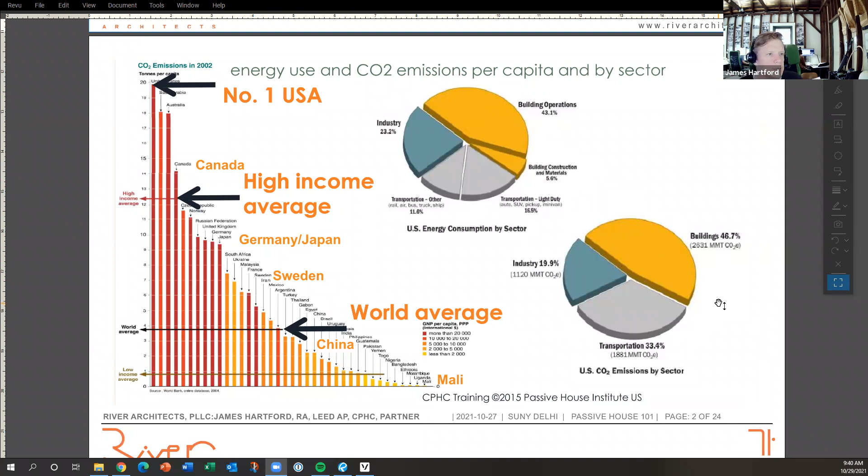But again, the good news is that you're looking at these big yellow slices here of these pies, almost half of it falls into our lap. And these numbers are a little different from the previous slide, but you can see that in the 40 plus range of the carbon in the entire economy is allotted to buildings, and so this is our chance and our opportunity. So, the thing about Passive House is that it's about reducing the energy wasted through the building envelope primarily.

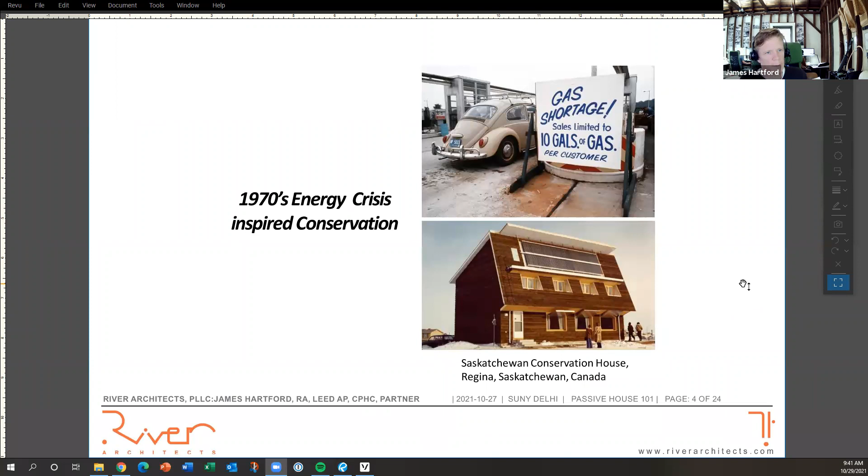And the history of it comes from the energy crisis of the 70s, and the first response to it was this Saskatchewan conservation house, which was really an experimental project in a very cold climate. But rather than just doing big solar, I'm going to just scroll down to this one. I actually know this man, Richard Levine.

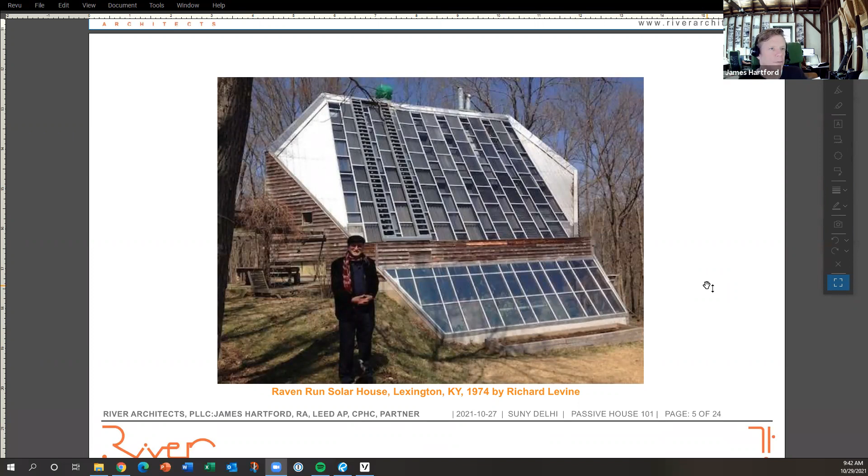Rather than doing big solar collectors that kind of both fry and then freeze as they cycle through the day, the idea of the conservation house, which really kind of outlined first what a passive house should be, is to just have modest amounts of solar heat gain, and to manage the losses and gains equally. So there's a solar thermal collector here, and shutters to help regulate heat loss during the night.

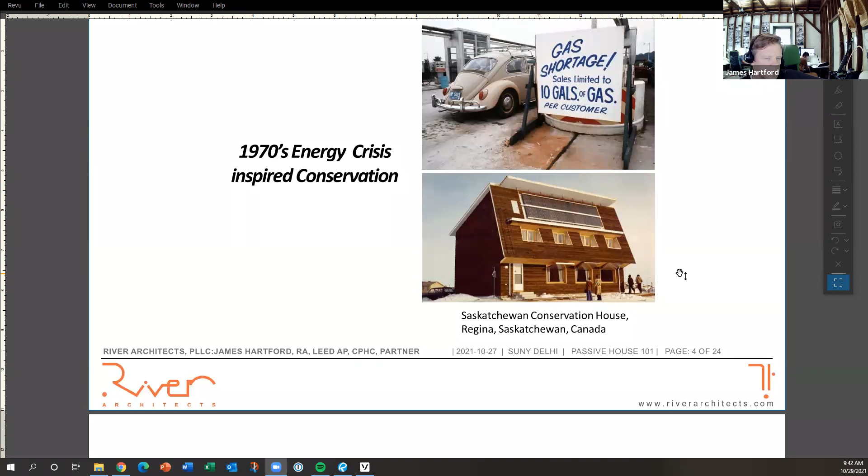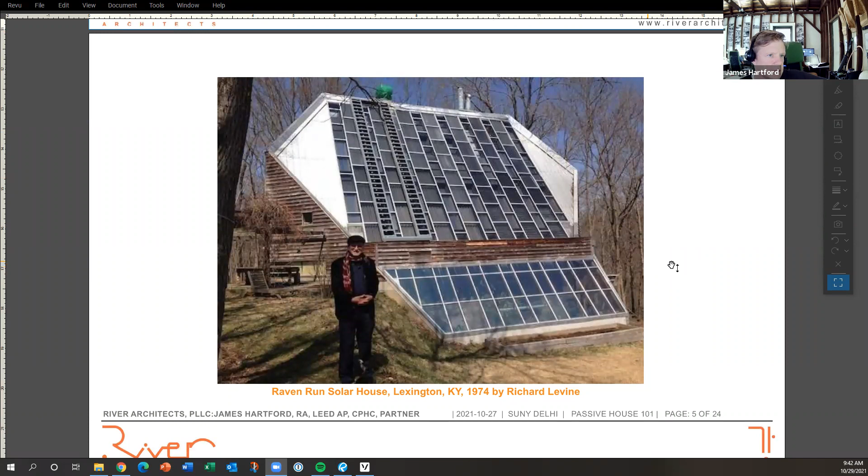And this is using off the shelf technology that was available back in the 70s, and now we've got much better techniques and materials available. So passive house is different from passive solar, which this is an example of, but the idea is about creating balance. So a conventional building, we can just look at it as just leaky and poorly insulated.

And the principles of passive house are basically to air seal it so that we eliminate the free flow of energy through gaps and holes in the construction, which create two things. Energy loss is one thing, but it's also moisture transfer, which when you transfer moisture across a temperature gradient, you create condensation, which is a very big concern for durability. And so air sealing is a core principle both in keeping a building from basically rotting from its own occupant load, but also to conserve energy.

Then after air sealing, insulation is critical, and protecting the building envelope, the insulation and the air sealing layers, with a proper weather-tight shell. And now, a critical thing though is that when we make airtight buildings, the occupants need to breathe. So early experiments in passive house had a lot of problems with air quality and actually mold growth because of the rampant condensation as well as high levels of CO2.

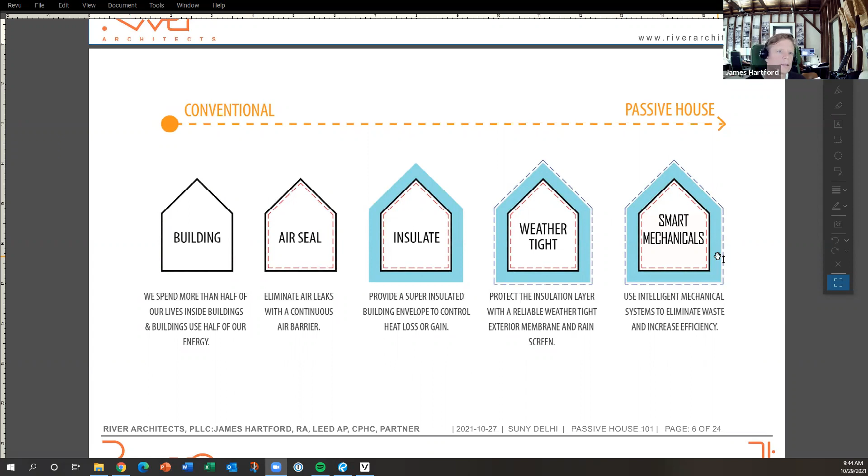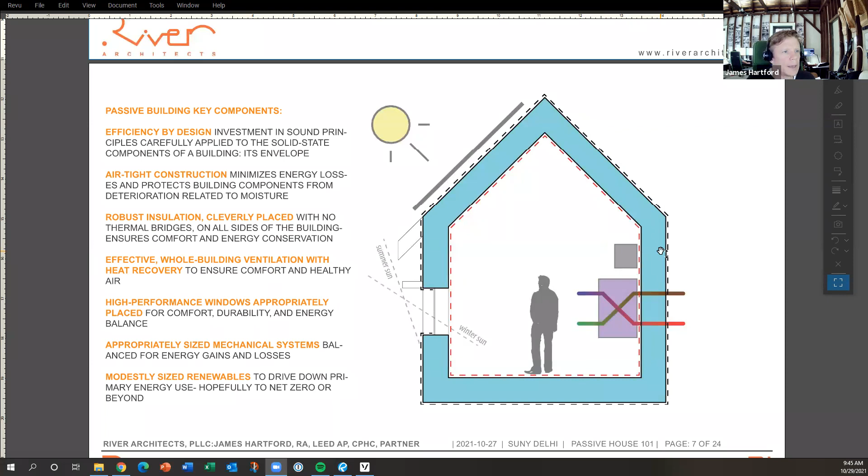And so kind of putting it all together diagrammatically, it's a simple structure with the fresh air ventilator here, a small, tiny little mechanical system for creating really backup heating or cooling. And an important aspect too is solar control. So these are things that you'll see eventually in the Cidery project as we get to it.

So we ask a lot of a conventional building, where we put both the aesthetic layers, both the exterior and interior sheathing layers, and the structure and the mechanical systems and the insulation all into one tiny little component, a typical 2x4 or 2x6 wall. And there's a lot of opportunities for air leakage and for thermal leakage when we have all this stuff crammed together. Thermal bridging, so where the studs are, heat transfer is very easily accommodated, which is not a good thing.

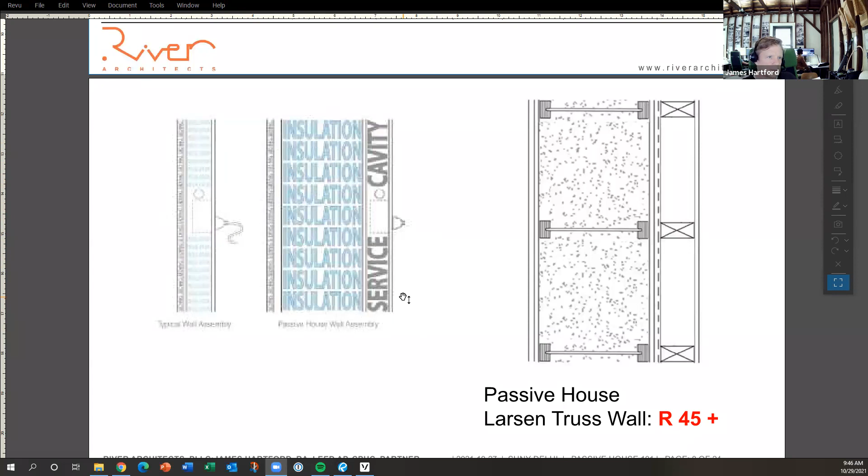So in a passive house wall, we like to just kind of separate the services and the functions so that we get them each to do their job better. So we have a much more robust insulation layer, a dedicated service, and usually structural layer that allow those things to happen uninterrupted. A ventilation layer on the outside so that we handle moisture much better, so that the exterior wall finishes hold up longer. So this is what the actual wall looks like in practice.

This is a section cut, plan cut through a typical passive house wall. So 2x4 structure, an airtight layer here, the insulation layer here with what we call Larsen trusses, which are essentially I-joists set vertically.

The thermal bridging of those little OSB layers is tiny to negligible, but we actually calculate that too in the heat flow calculations. So, a typical wall in New York State would be R19, or code is now adjusted a

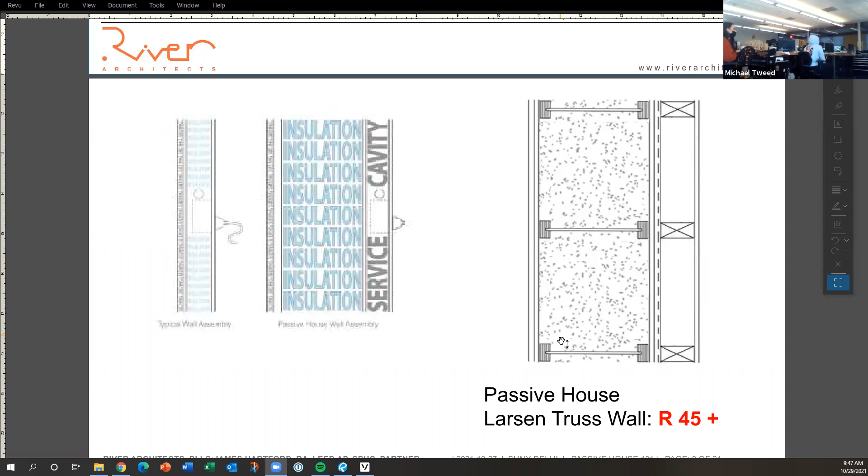little bit to, okay, now I'm getting that feedback again. So, okay. Turn down the volume of the TV a little bit, see if that helps. That's weird because it just came out of nowhere. All right.

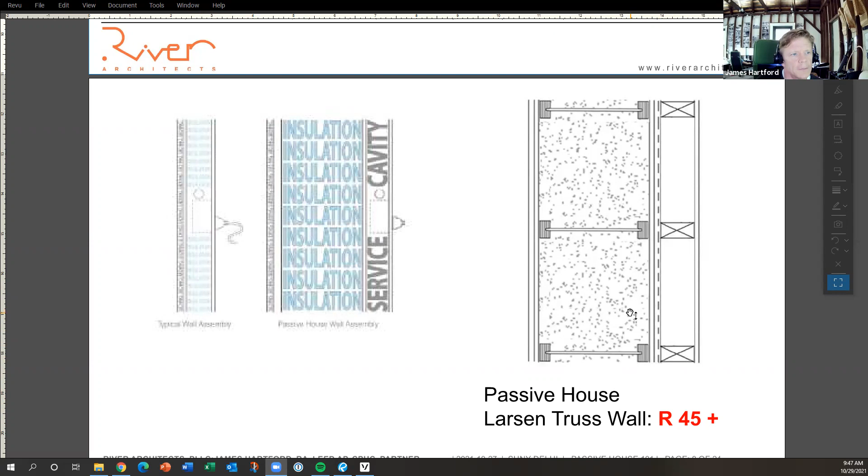So we typically see about an R19 wall for conventional construction, and we're R45 to even R60, 65 for a typical passive house wall. And just kind of looking through the history of mechanical systems throughout North American history here. 19th century, people usually used wood or coal to heat their houses and put on a sweater. Then we made things extremely complicated and hard to run. And then passive house is really in a lot of ways coming back to those simple methodologies of the early days, but with good building science added to know that we can have more comfortable spaces and healthy spaces for people.

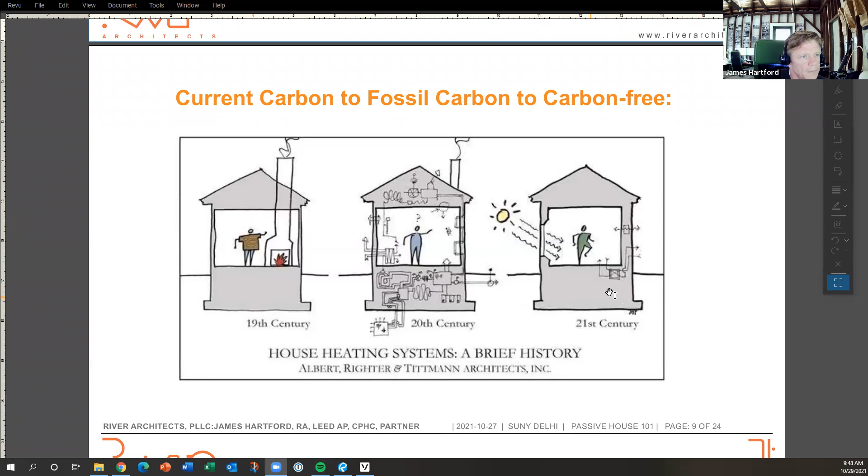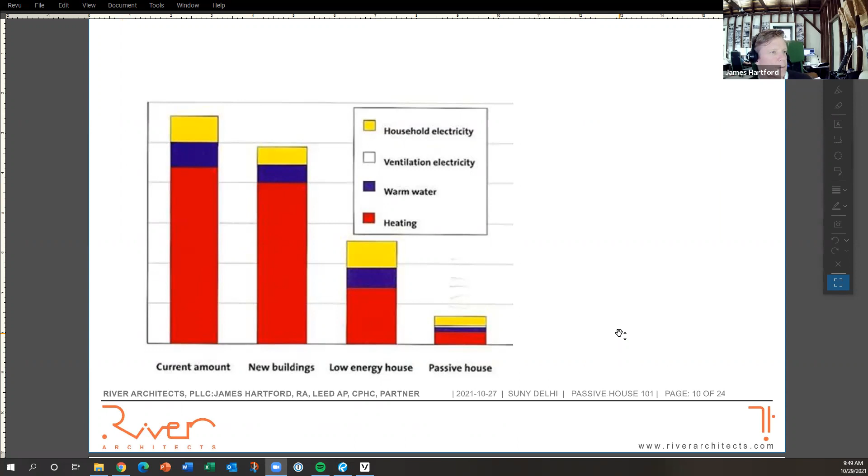So the energy conserved is considerable for a passive house. We're typically saving 70 to 90% of the energy needed to heat or cool a building before any renewable power sources are included. So by doing a very well conserving building envelope and doing smart mechanical systems, we're able to drive the energy demand 70 to 90% lower than current code buildings.

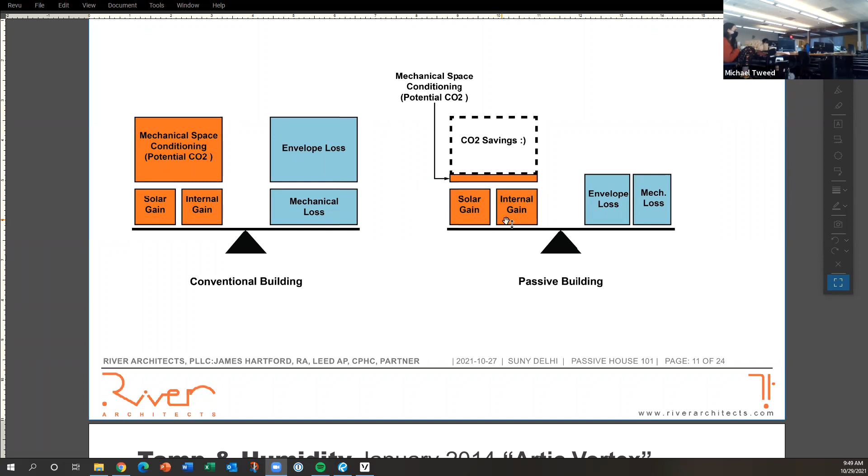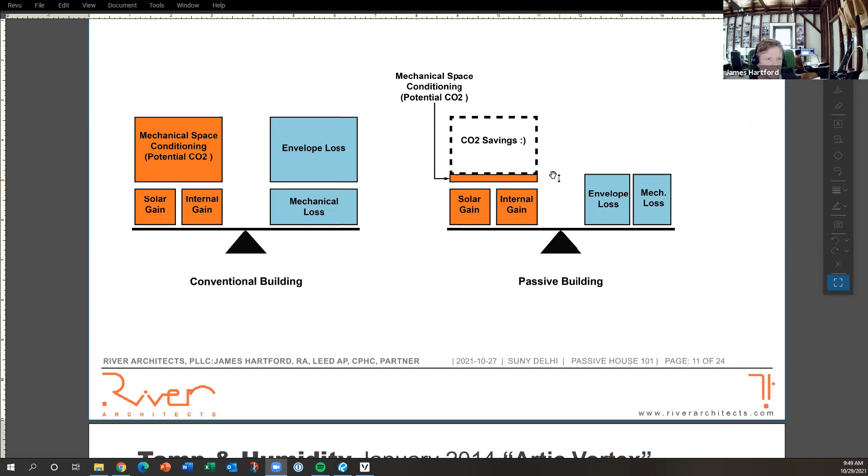And so, it's really, again, about balance. In a conventional building, balance is obtained by letting energy losses just kind of run high and then making up by huge mechanical systems. And so our goal with passive house is to lower the energy and the envelope losses to such small manageable levels that essentially they're balanced by solar gain and internal loads, such as occupants giving off heat or the heat from our computers, so that the amount of energy needed to be added to the system is quite small.

And just looking at how these buildings perform, this is the Arctic vortex from January 2014, where there was a severe storm that basically knocked out the power grid in some places for as much as 2 weeks. So when you have conventional buildings that lose power, people are immediately put into harm's way because the buildings can no longer sustain life essentially. So as soon as some climatic catastrophe happens, such as the snowstorm in Texas last year, or the polar inversion, or if there's a hurricane that comes and knocks out power, people are usually in a pretty bad way right off. But in a passive house, there's a level of survivability, especially in cold climates, that it takes very little energy to heat or cool, and people are not put in harm's way and don't need to be evacuated.

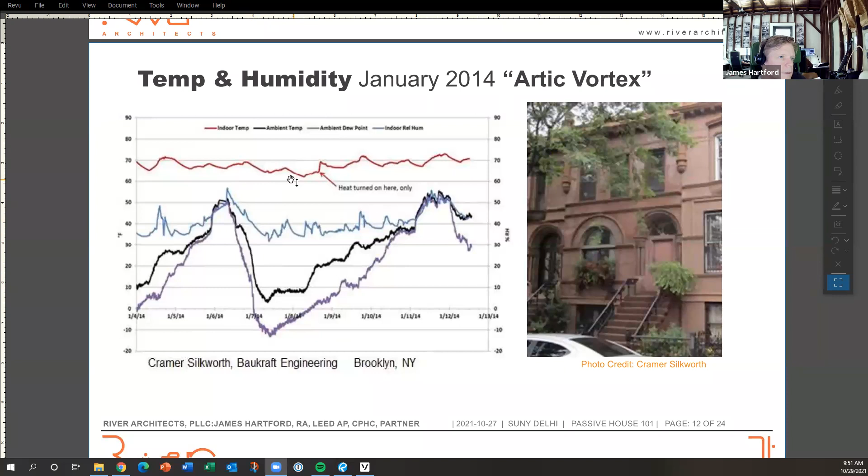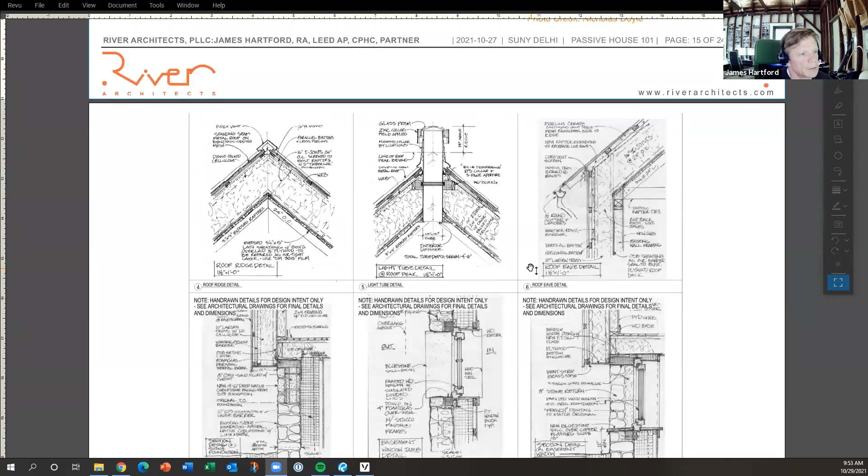But some of the details that I had developed for it. So you can see that the original timber frame is here, and then we air sealed over the top of the existing sheathing, and then did the same Larsen trusses that I'd shown in that earlier diagram, both for the roof and for the walls.

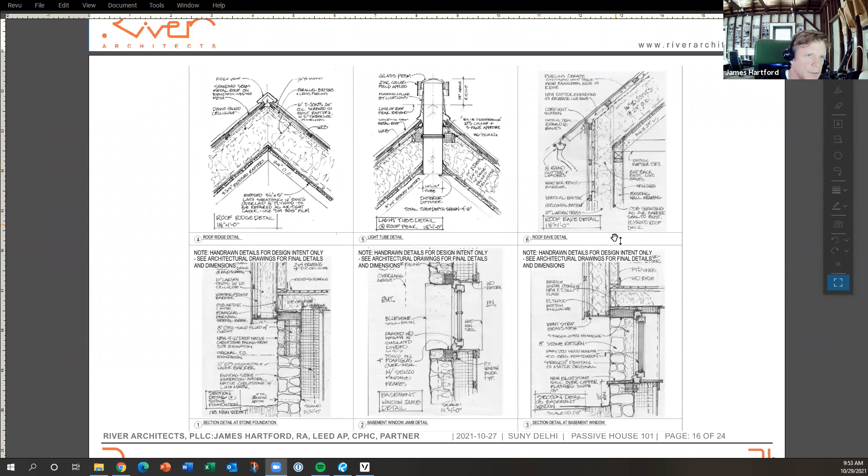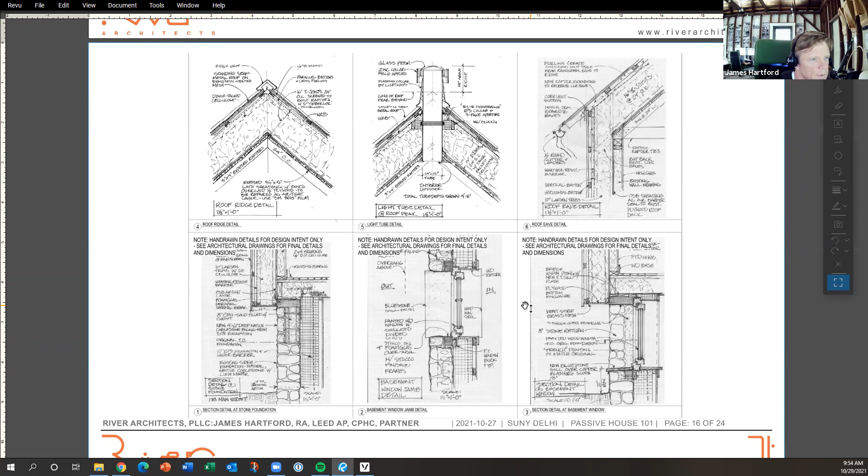So here it shows the walls as being sheetrocked, but we actually left the timber exposed. And this is an early detail where I'm showing the original stone foundations and then what we were planning to do to extend them. What we ended up doing was taking these out and then building the walls outward, so we actually gained an extra foot in each direction by redoing it, and eliminated this heavy overhang that was resultant from working with original foundations. So the end result was actually better than trying to work with the existing.

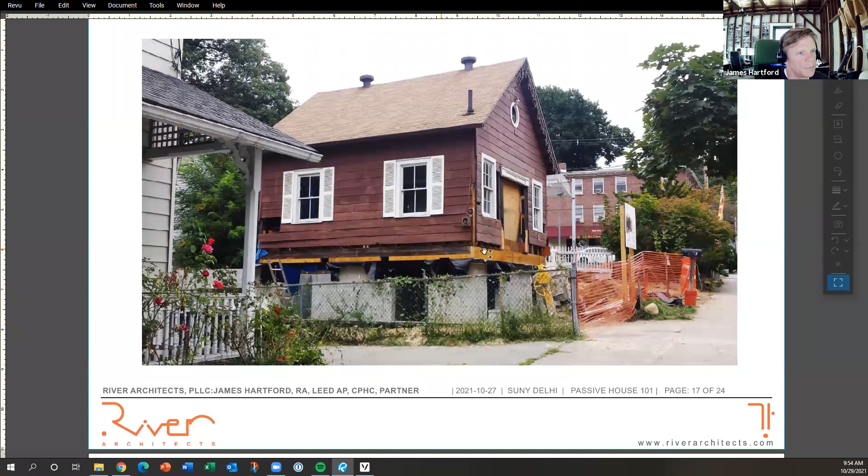But this is the building after we had redone the foundations and put the frame back on the foundations, before we stripped away the fake shutters and all that. We actually have a thermal break between the timber frame and the concrete block, which was doing all the heavy lifting of the structure. You can see right there, it's a 4-inch thick foam glass layer, so that we've eliminated thermal bridges entirely.

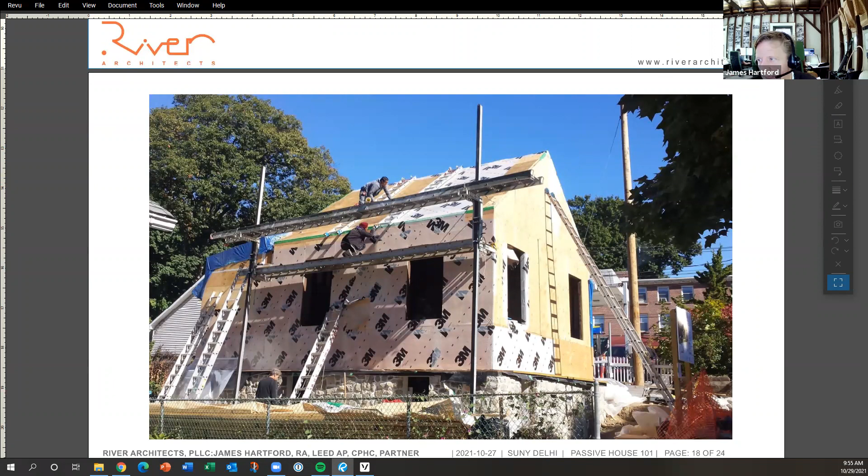So we had cut back the eaves so that... I gotta do something about this mic. It's killing me. Sorry. Okay, so

We cut back the overhangs so that we simplified the structure so that we can air seal directly over. So this film was basically a peel and stick that we applied to the new sheathing that we put on over the timber frame, and we had left the original sheathing on the roof. It's not the true original. It's board sheathing underneath it. You can actually see it in the space here. And by cutting back those eaves, we were able to really make this very simple to air seal and then to apply our Larsen trusses over that.

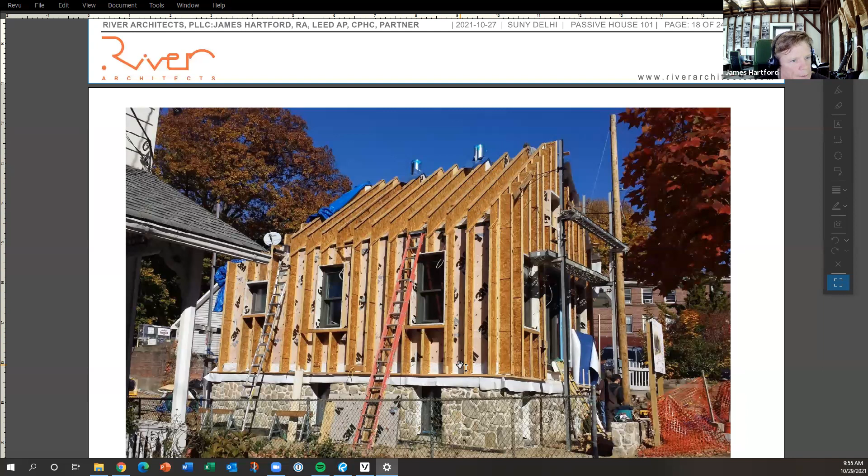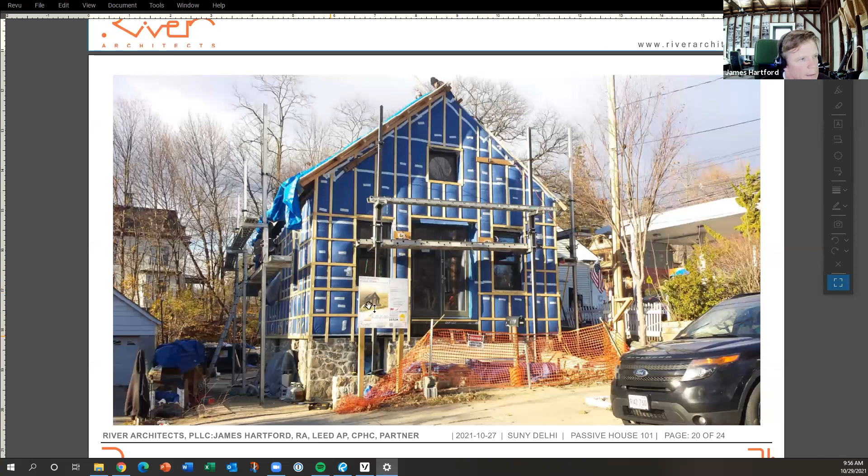And these tubes here are light tubes that bring light in high into the roof system. They're placed actually where the original roof vents were from the open forge that was in the middle of this space from the blacksmith days here. So these, what we call Larsen trusses, are then wrapped in a blue fabric. You can see it starting over here, and then dense packed with cellulose insulation, so that it's analogous to a puffy down jacket.

And then we recreated the rafter tails so that we bring back the original look, because we are in a National Historic District, and that was an important aspect to them. So the end result is that we have the timber frame as it was originally constructed, and how the original inhabitants used it when it was the blacksmith shop. So we brought that bit of history back and kind of upgraded it to face the future where we have to stop using carbon in our buildings.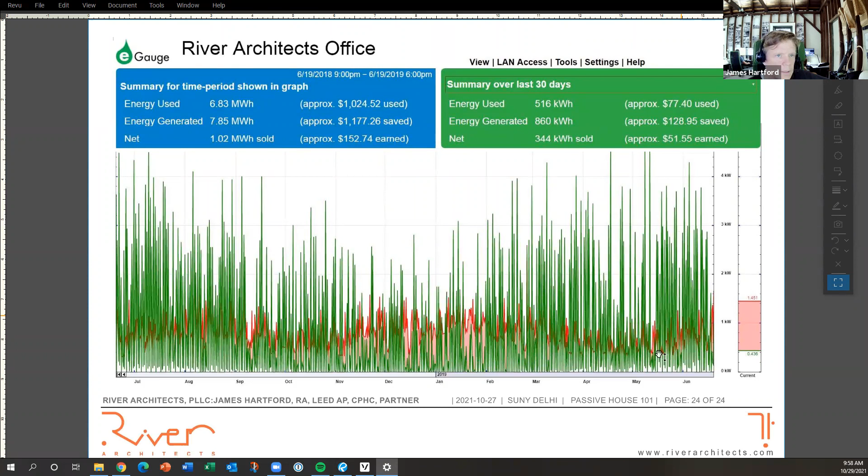You can see all those green peaks outweigh those red peaks considerably. The few days of bad weather, late January, early February, are greatly offset through the course of a year. So that's the presentation on Passive House.

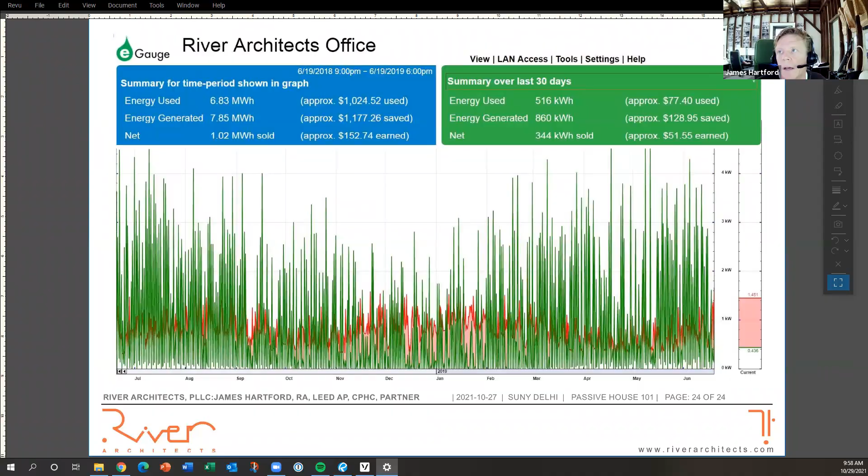All right, I had it on mute because I thought that might help the volume. That helped a lot. Thank you. I appreciate it. Did it? Okay. Yeah, it's hard to keep track of your thoughts when you hear yourself. Yeah. I finally figured that out.

Okay. Any questions about Passive House? I'll pull them through so you can hear. Great. No questions, you guys? What do you guys think of Passive House? Pretty cool. You think it's pretty cool? Yeah.

Do you think it starts to be like some of the reasons we talked about in general about how we have the spacing for the material and how we're talking about really thick walls and roofs as we're drawing our sections and plans? And this also is about R value. Can you explain a little bit for our students about the R value of materials that you use for the Passive House certified buildings?

Great, yeah. And so the materials we use for insulation, and I would imagine that you've all had classes on thermodynamics so that you understand what an R value is and that it means resistance as opposed to conductance, and that the inverse of R value is a U value, which is about conductance.

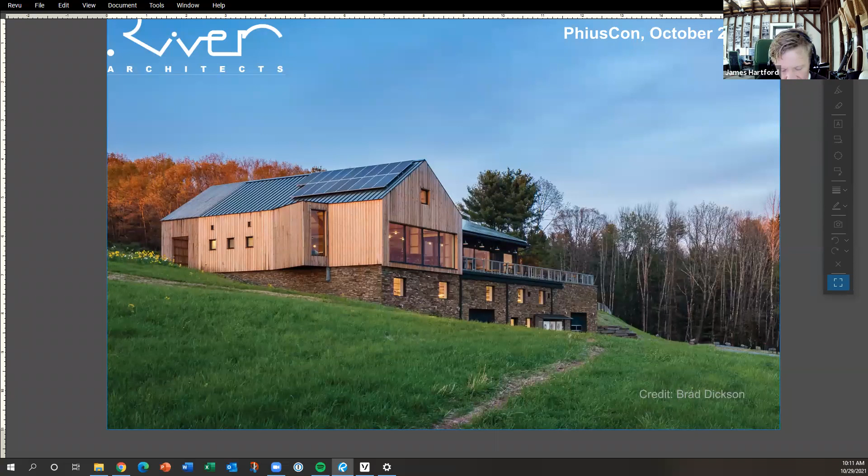Oops, let's see how that. Okay, let's hope this behaves for me. For some reason, this is not scrolling. Okay. The TV cut out on us, so we didn't hear the last minute. Okay. So one's on mute, so hold on. Let me do this. I'm gonna try this. Okay, I think you're back. Can you see? Okay. Great. Yeah. All right, so good. I'm having some technical issues. Oh, okay, now I got it worked out. I have to relaunch my share. Okay. Okay, I'm good. There you go. Okay, here we go. All right.

Sorry. So our Cidery project, we completed this this past winter. I've given this presentation at the PhiusCon conference in Tarrytown just the start of this month. It's roughly a 9,000 square foot building that's both event space and tasting upstairs and production down at the lower level. So let's kind of talk to you about who we are and what we're doing.

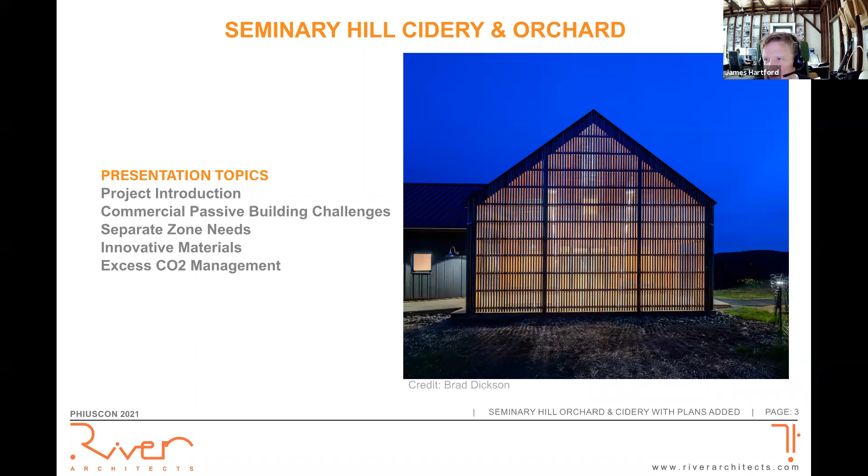And so our cidery is the world's first fermented beverage passive house in the world. So we've beaten out all the breweries and wineries and other cideries throughout the world. We were approached by the Doge family, who is a multi-generational family in Callicoon. They've been there for I think 4 generations, and have a long history of apples in their family, including some bootlegging as well, when they were making cider during prohibition.

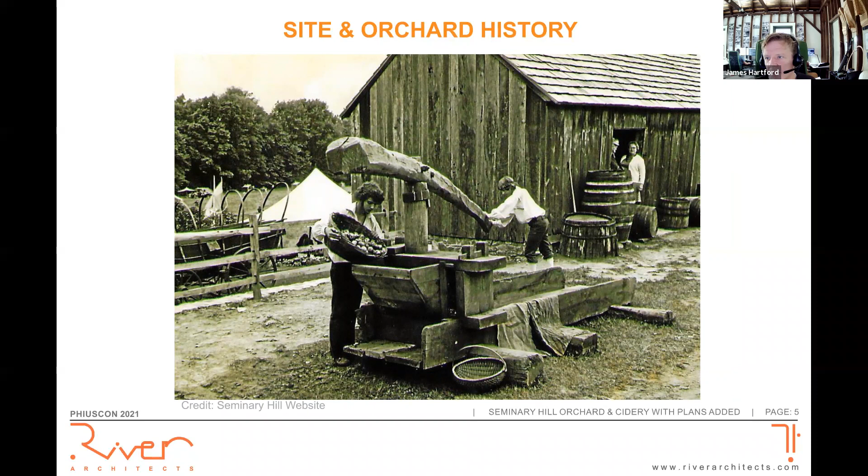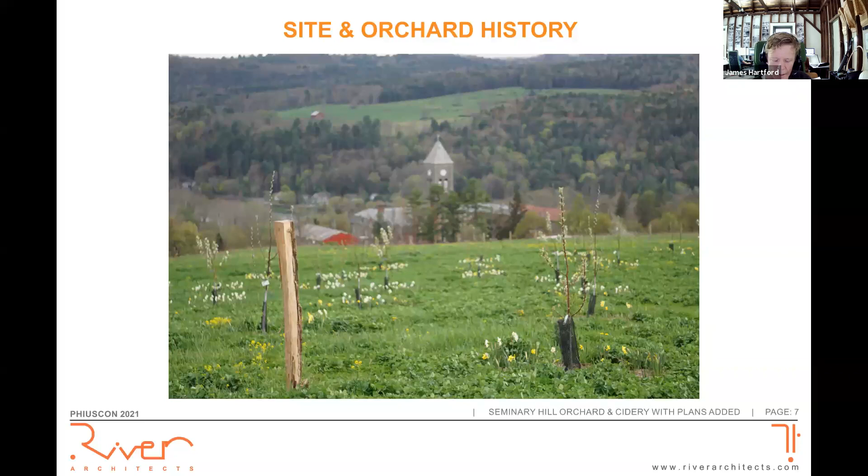What you can see here is the co-planting that's done. All the tulips and daffodils are planted around the trees because it actually keeps voles from digging through in the wintertime and harming the trees. The voles are rodents that will gnaw the bark off of a tree and kill it. And so the bulb plants actually persuade the voles to go elsewhere.

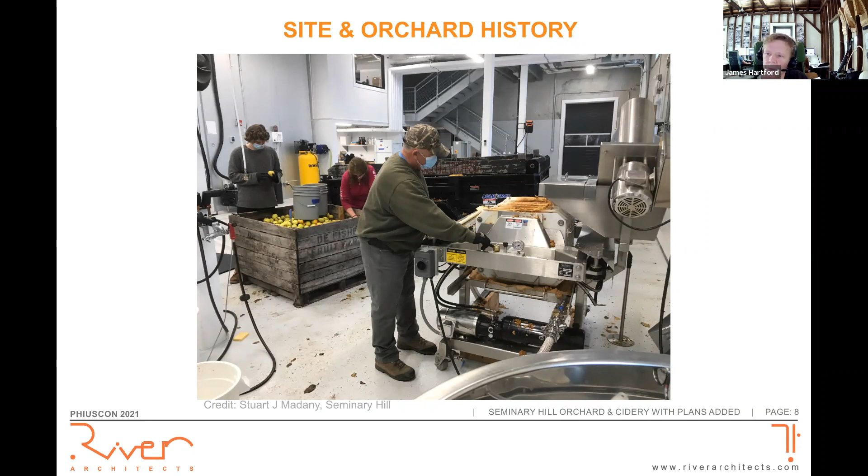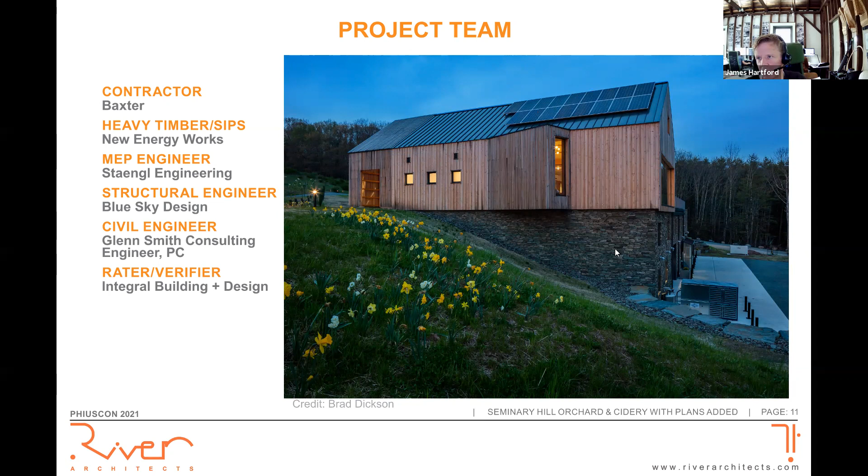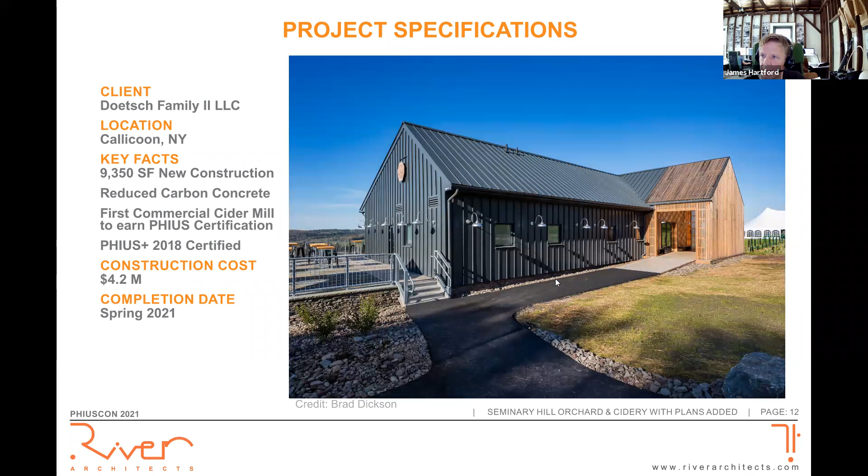And so the building is, this is the approach to the tasting and event space upstairs, and the cider production is down below. Site plan, it's a little hard to read here, but you can. Here's the access road. It's uphill, and then it's all downslope to the orchards here. So the apples are brought in at the lower level, and trucking is there, and the public approaches from the top.

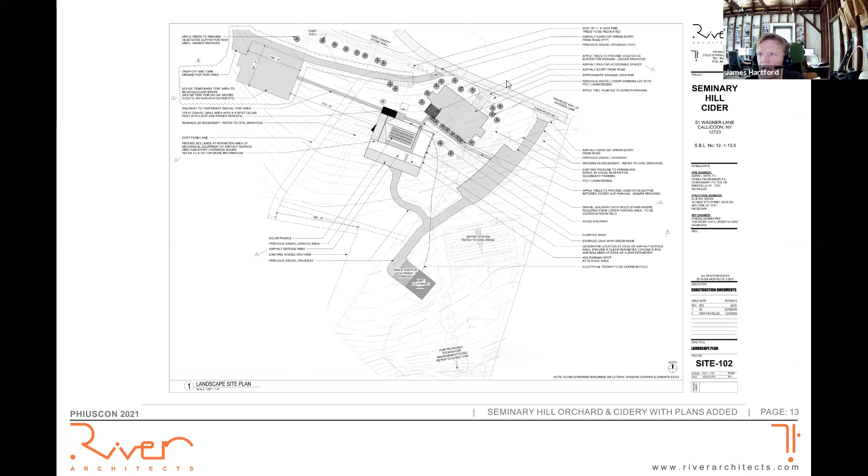It's very hard to see here, but this is the construction plans of the tasting space. So here's that entry porch there, and the main entrance into the space. On the main tasting room and that peek out window there, a commercial kitchen and a tasting bar area there, and then restrooms and changing space there. Stairs that go down to the lower level, and another kind of dining space, and then that rear balcony that

looks out across the valley, and then actually an outdoor dining space here that's the roof of an aging cave that's actually non-conditioned space in terms of mechanical systems, but it's built into the hillside and taking advantage of the constant temperature of the earth, and then plus essentially a green roof on top of it.

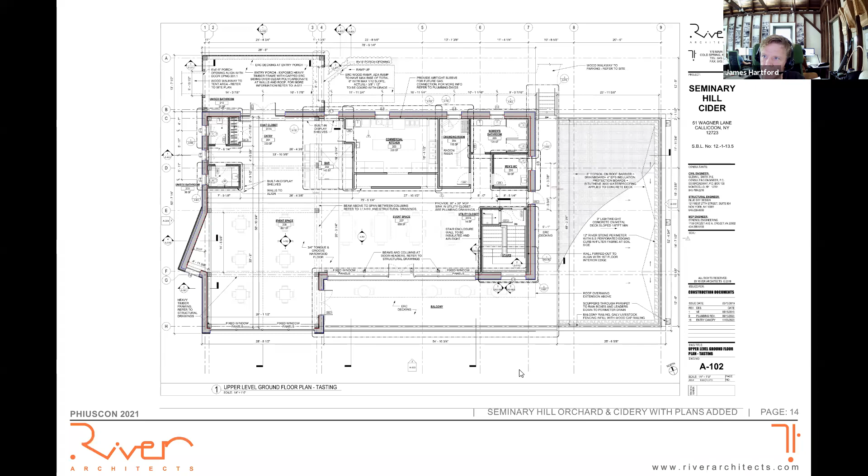Okay, and then this is the lower level. So this is the cidery production space. So here is our apple pressing area where you saw that one photo of. And then this is the fermentation area. And so these are the vats where the cider making happens. You can see here these dashed lines which indicate the floor drains.

So the floor slabs are pitched towards the center drain, so that everything is washable, and if a fermenter or a vat leaks, it goes into the drain and doesn't create any kind of problems. You can see that that happens in several different places, and also inside of the walk-in cooler, which is this large piece here. Typically, the fermentation happens at about 50 to 55 degrees. Again, so that ground temperature really works well for that.

And then they use the walk-in cooler for actually, once the fermentation is complete, then they'll put it in there to cool it off so that it actually stops the fermentation process. And they have vats in there, or they'll have full kegs or full bottles as well, waiting for delivery that they'll store in there. And over here we have a locker space, but also a laboratory, which is really

important. That's where they may maintain yeast cultures for certain flavors, but they'll also test for the specific weight of the liquids, which will determine the alcohol content. So an important aspect to it. And hygiene is really important, so they're constantly washing. So the lower level is waterproofed up to 8 feet high up the walls, and so it's really just like essentially a clean bathtub inside of there.

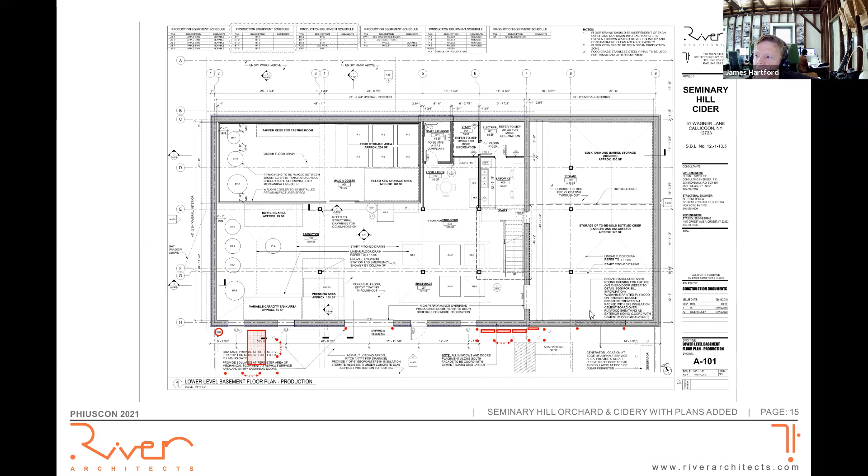This is that aging cave, and we call it a cave, but it's a human-made space, but essentially the function is the same as a cave. And then this is a section cut through, again, the upper level with the tasting space, the storage cave, and then the production space down below. And here you can see actually a little bit of the thermal envelope.

Because the upper space is really made for human comfort, this is one climate zone. The lower space is made for fermentation and apple storage, and so that's a separate climate zone here. And so you see the insulation layer across there. It's got its own airtight layer here. So this is one envelope, and the upper level is airtight and insulated.

Here you can see the insulation running through the deep trusses of the roof there, and here we've got actually structural insulating panels for this part of the enclosure here. And there's actually no insulation under the slab and very little insulation in the walls here, because we're looking for that ground contact, so that constant temperature coming off the earth, about 55 degrees, is creating all the conditioning that we need for that space.

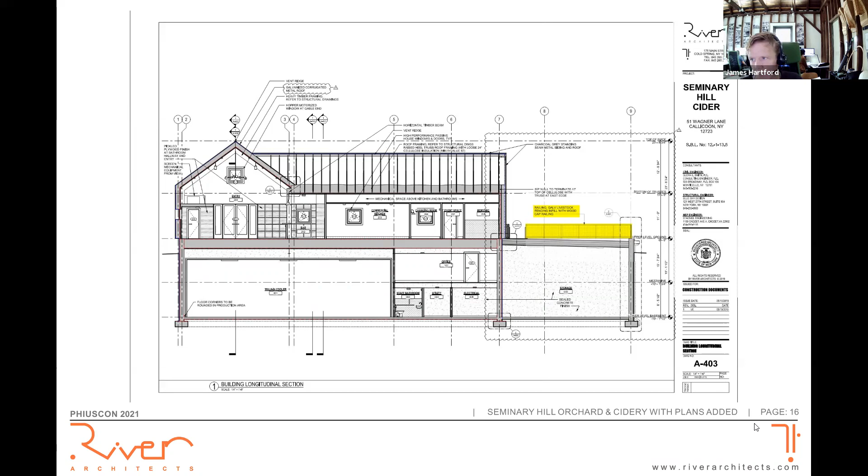So again, human comfort, apple comfort. So the interface of the two. And we use WUFI models, which is an energy simulation software that takes into account the R-values of our products, the solar orientation, the performance of equipment, and that really helps us calculate the balances.

So here you can actually see these green arrows. It's showing basically the heat flux through the windows, which is an important aspect there. And the stair tower connecting the two spaces is actually part of the thermal envelope of the lower level. So we have actually airtight doors and insulation there to separate that from the upper space here. And that's that.

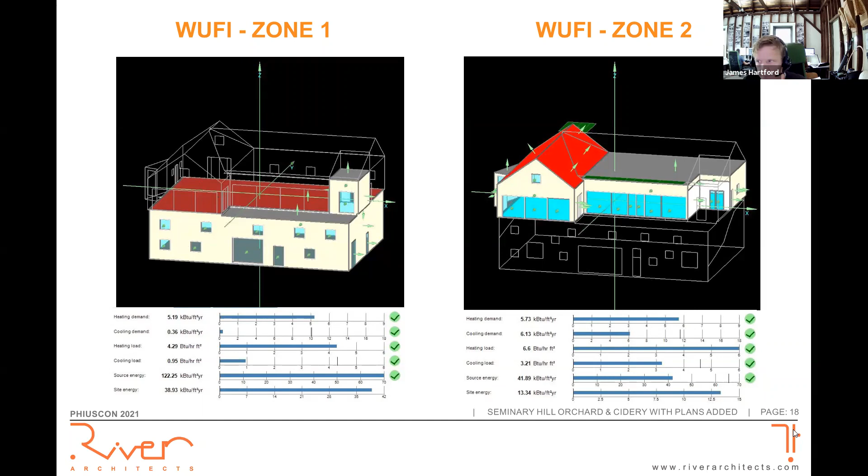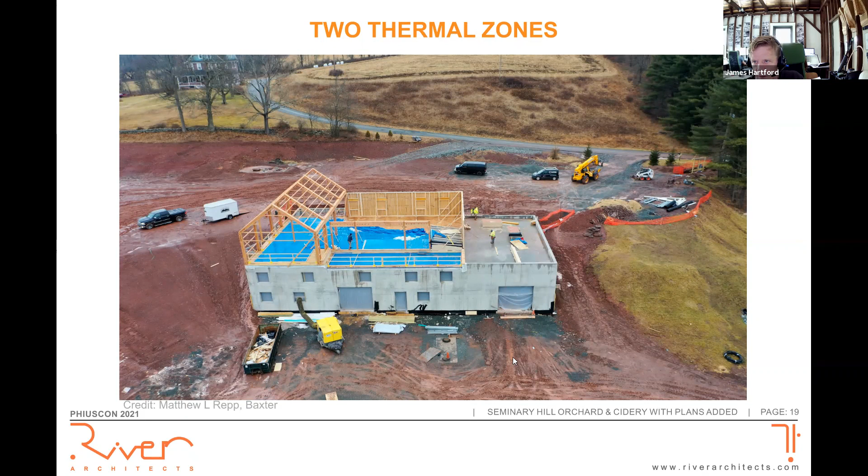Here's the cidery under construction. That red kind of Martian earth look is actually the local blue stone, as they call it. But here it's got a red color. But it took actually quite a lot of blasting to create this hole for the excavation.

So our wall systems, we have concrete with actually a glass additive, an expanded glass additive that makes the concrete insulative and also lighter. So it's actually a more sustainable choice than conventional construction concrete.

And here, in spite of what I had said about avoiding foam, sometimes we also have to look at the cost of things, and so we have EPS foam for the structural insulating panels, which are basically a sandwich of foam with a skin on either side. So in this case, it's an OSB skin on both sides.

EPS is actually a better choice than other types of foam, such as polyisocyanurate or XPS, extruded polystyrene. EPS foam has different blowing agent chemistry that has a much smaller global warming potential.

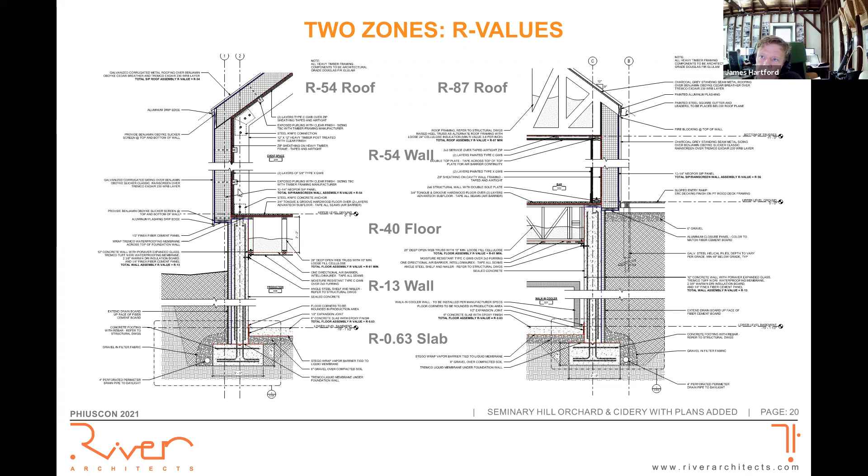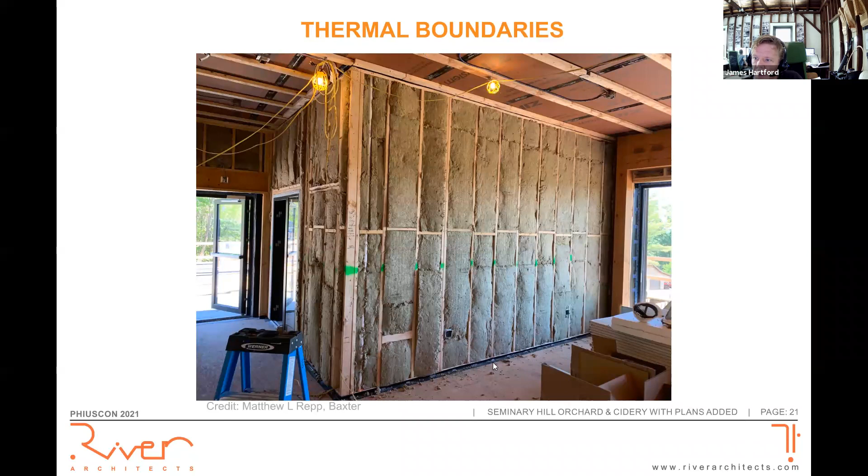We have a timber structure that's set inside of that, and you'll see more of that. So here's the insulation and the air tightness layer at the stair tower, and down below the exposed concrete with the additive.

All the steel work actually had that galvanized before it's brought in so that we don't have durability issues. You can also see the air tightness layer here, this Intello fabric that creates the air tightness and the air control so that we don't have leaking between spaces.

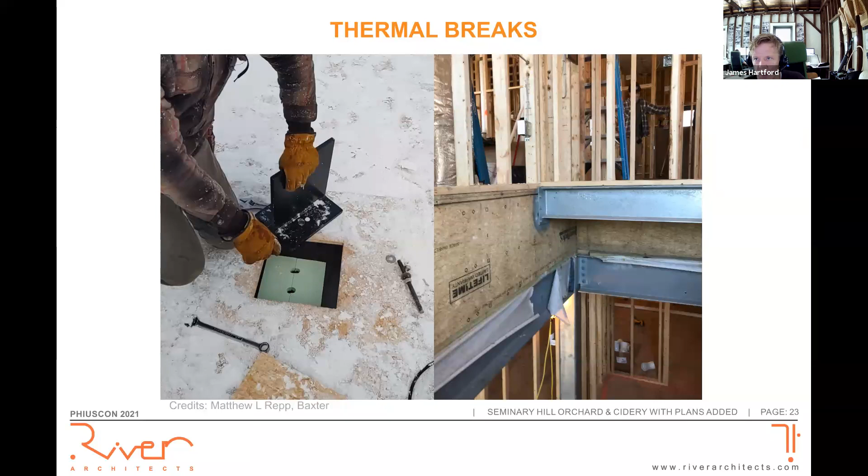And then the timber of the upstairs is actually set on these green pads, which are a high compressive strength thermal break. So it's essentially a type of foam that has very high compressive resistance, so that we're able to bear the structure on it and still avoid thermal bridging.

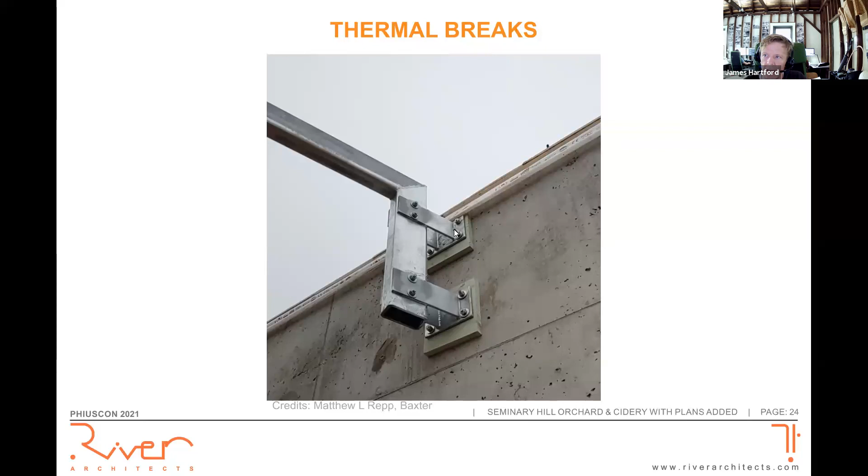And here you can see it outside. This is the bracket that supports that peek out window. So these brackets are actually stainless steel, both for durability, but also for conductivity. Stainless steel has much lower conductance than carbon steel.

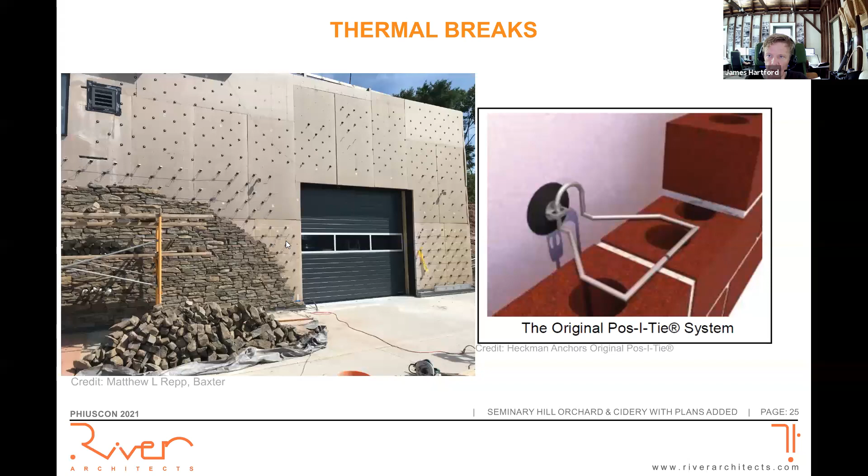And then foam with ties that are supporting the facade of stone. And these ties are actually thermally broken too, so we're reducing the amount of conductance through these structural ties.

The garage doors are actually high performance doors, and everyone knows from their parents' garage doors that they can be leaky and miserable. With these ones we're able to meet our very tight air tightness and thermal performance requirements.

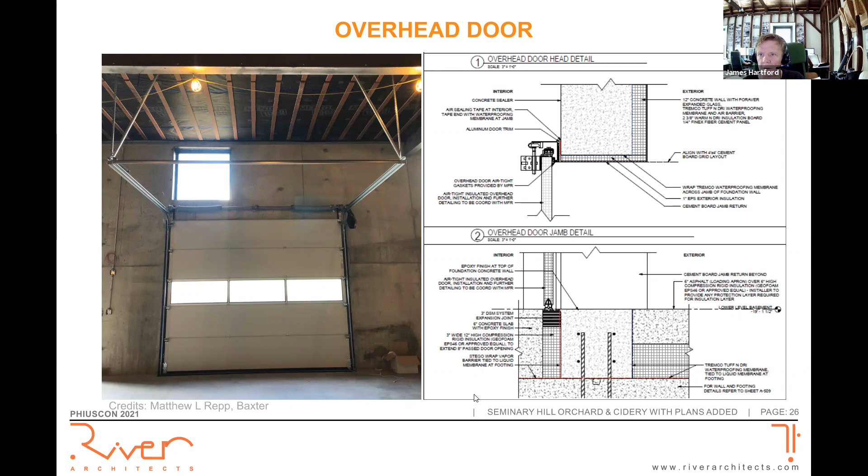And it's really important to make sure that where the windows come in, their air tightness is maintained, so that we don't have leaks around the sashes and all that. So we use liquid air barriers and tapes to do that.

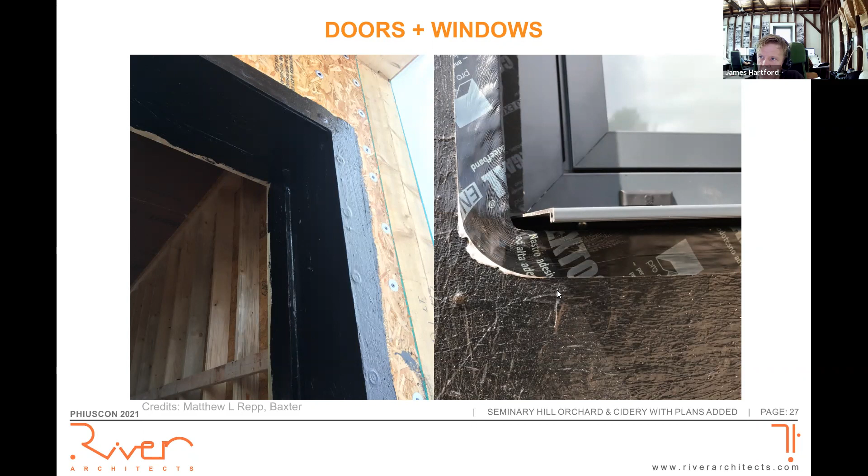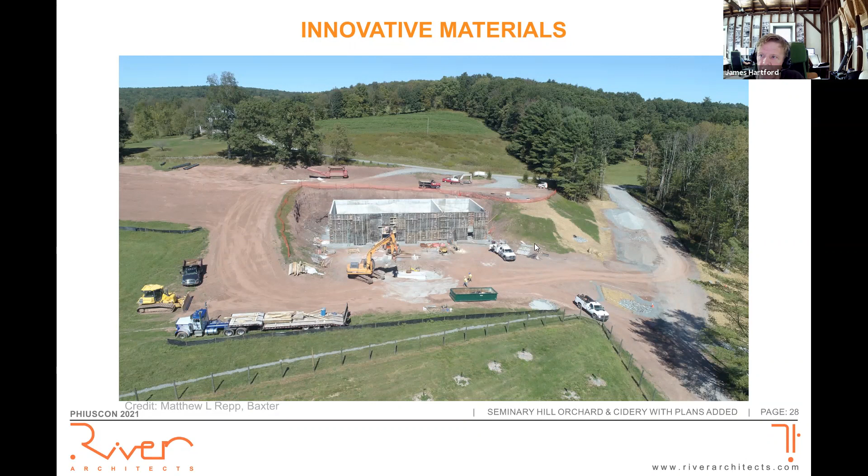But the risk of those in high walls like this is that they can actually burst, and those blowouts can be a really big problem on a job site. So our concrete guys were very nervous about that. So switching to this expanded glass product simplified the concrete pours. We were able to use conventional formwork, so it was less risky.

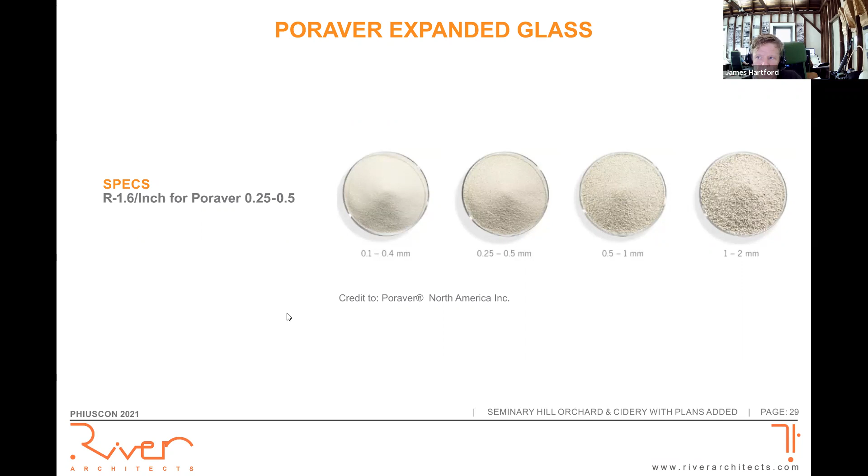So the glass beads are poured directly into the concrete mix. They added a decent level of insulation that converts the concrete essentially from a net conductor to a net insulator. It's not a huge thing, but its conductance is actually better than wood. So it's an upgrade. And it's really, again, standard concrete forms. It's just simply added in this bag here into the mixing truck and then poured into place.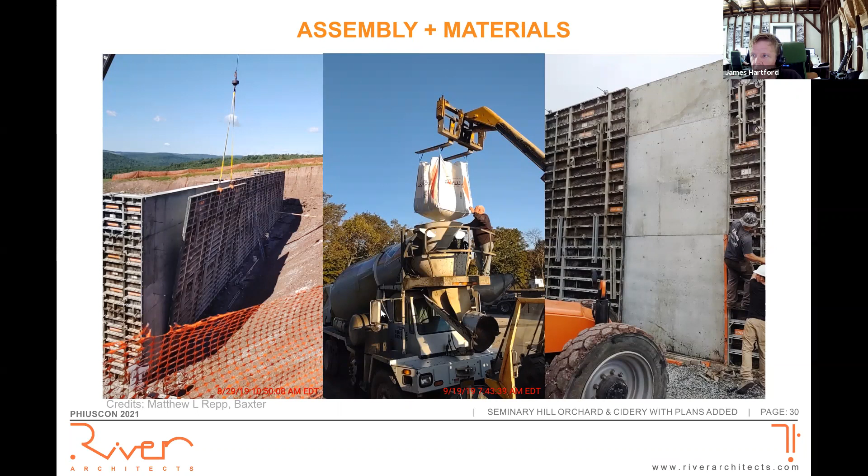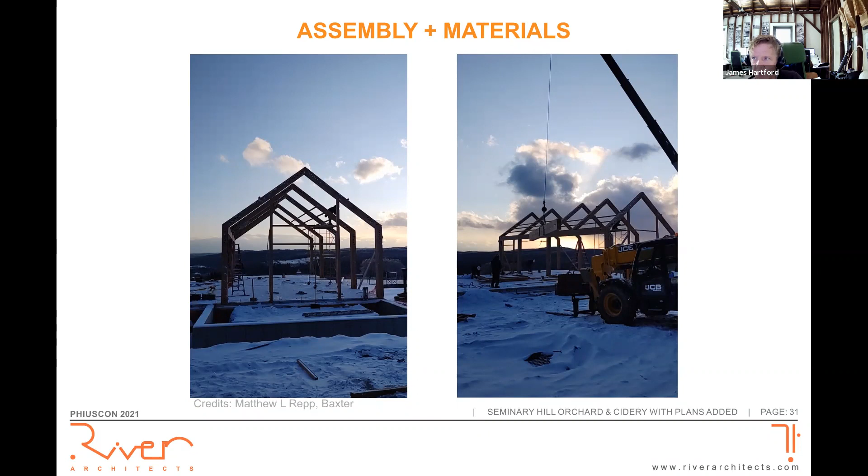The timbers were all made off-site as well as the SIPs, so all of this aided in the construction time. It was a really hard winter that we built through, which created a lot of problems. All that snow was hard to manage, and it created some water intrusion problems when we were in vulnerable stages, but we made it through.

But you can see the pre-cut, pre-shaped panels. These are coming directly from the factory with the windows pre-cut into them, and the splines and things that are structurally necessary for them are done in the factory. So it just gets picked off of trailers and set with a crane onto the site.

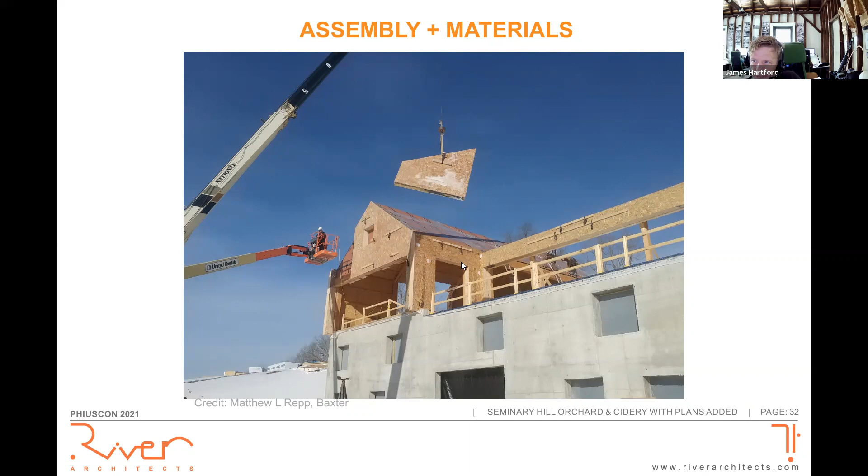Again, the heavy timber came from the factory actually, even with a coat of finish on it, and the steel connectors all done in the shop, so it was much better controlled. We had standing seam metal, which really receives the solar array quite well, and then our rain screen on the outside there, and then the finished wood is actually reclaimed from the old Tappan Zee Bridge that was demolished.

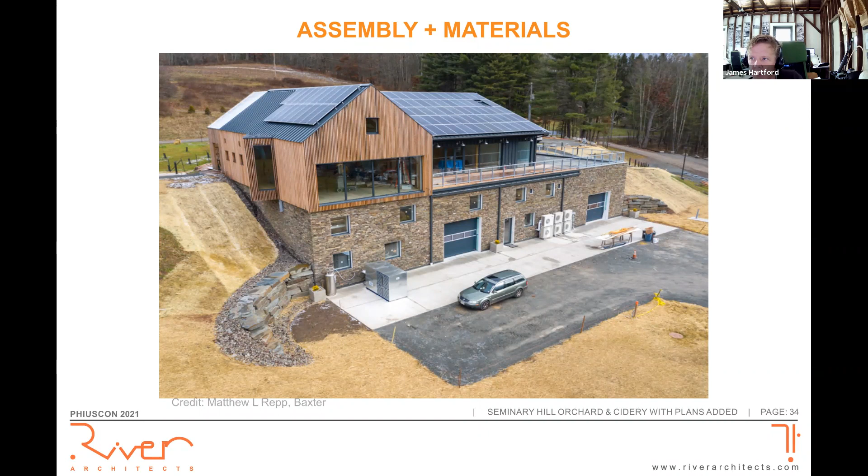There were actually wood pilings that were surrounding each of the piers of the bridge to keep ships from damaging them. Those were actually old growth larch from New York State that we were able to purchase. A mill had bought all of the timber that was pulled out from these, and it was over 1 million board feet, and so we were able to use that. It's naturally rot resistant and beautiful, and it's locally sourced sustainable wood. And standing seam metal because it's cheaper.

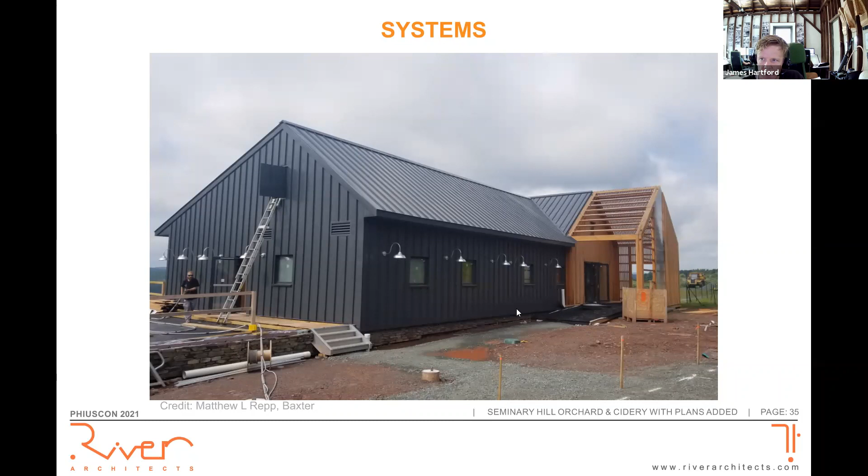These are the inlet and the outlet of the fresh air ventilation for the building, and so these manage all of the air for the upstairs, which is a challenge because in a cidery, the tasting room might have maybe 2 or 3 people there during the day when you have the kitchen staff prepping for meals. But then with an event, you might have 200 people in there at one time. So the mechanical system had to accommodate that.

One of the things that we've done was actually, instead of using conventional gas burners that you would see in a kitchen, we used induction burners. So that resulted in us not needing to vent the kitchen to the outside, which is a huge energy loss in any kind of mechanical system. And this actually creates more flexibility for the kitchen, so that they prefer this over like a large six burner.

And this is the entire mechanical plant for the building. We've got 4 outside air handling units for the heat pump, and 2 that are actually water-based that help with the space conditioning and the refrigeration in the lower production space. The water-based one actually works better in the lower temperature range that space is conditioned to, while the air source heat pumps are really made for like regular human comfort zone.

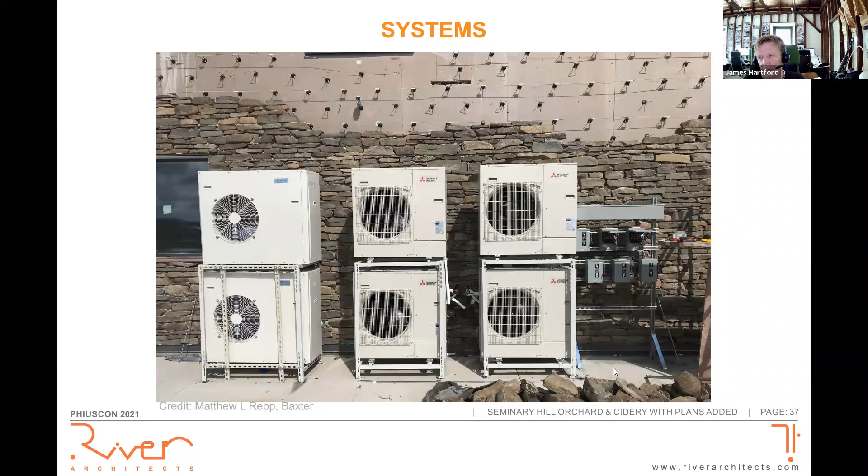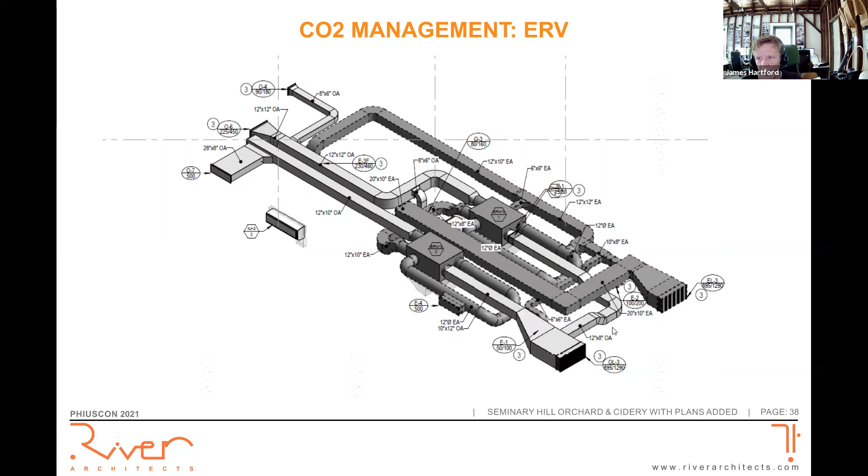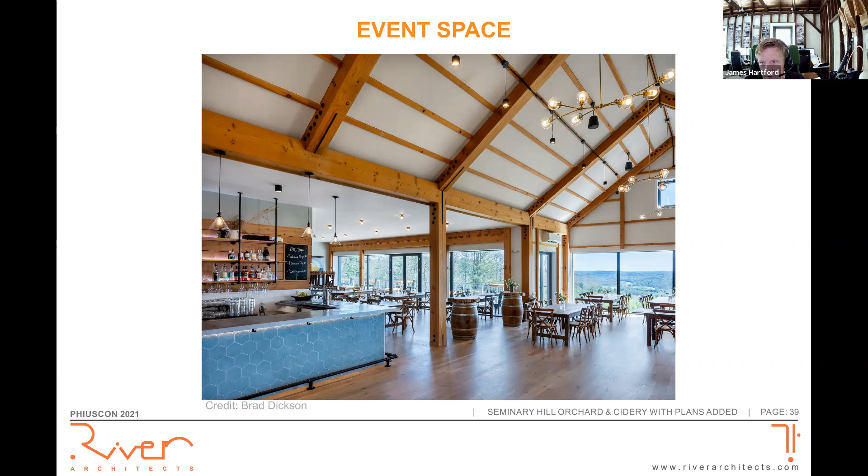And so this is a diagram of the fresh air ventilation. It's fairly complicated, mostly because of the huge range in the occupancy. And this is what the space looks like, and you can actually see the Delaware River winding around out here, and some handmade tiles and zinc bar top, and some more of the reclaimed wood from the Tappan Zee Bridge.

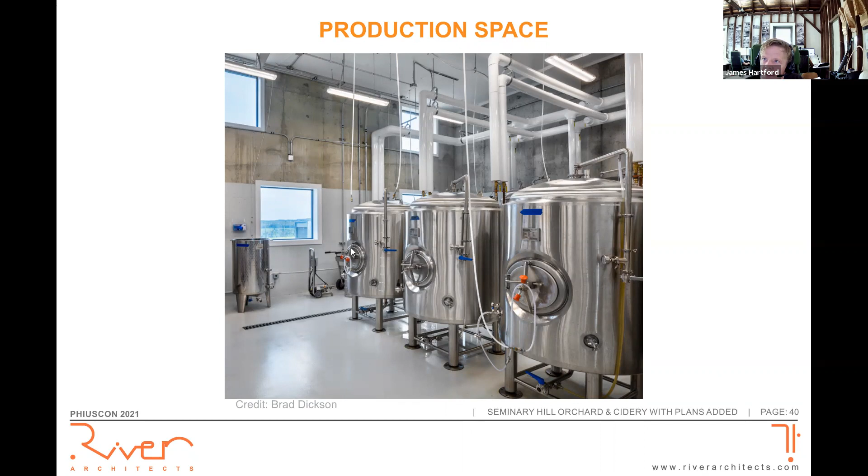One of the big challenges in cider making is that they use a lot of CO2 in the process. So what'll happen is they use CO2 to flush the fermentation tanks when they are basically draining out the cider as they make it, and they use the CO2 to keep oxygen from entering the tank and creating the opportunity for bacteria to grow. So the CO2 helps control what is happening in the tanks, because they need predictability in making the product.

The CO2 that we're talking about is not fossil fuel based, but it's just the natural CO2 that comes in a bottled form from manufacturers, so that they have that for their production. The fermentation process itself also kicks off a lot of CO2 as well, but that's easier to manage than this wholesale, just like flooding these tanks and then basically letting that dump back out when they fill the tanks again with the apple juice. And that was a big challenge for us to manage because this is very, very high.

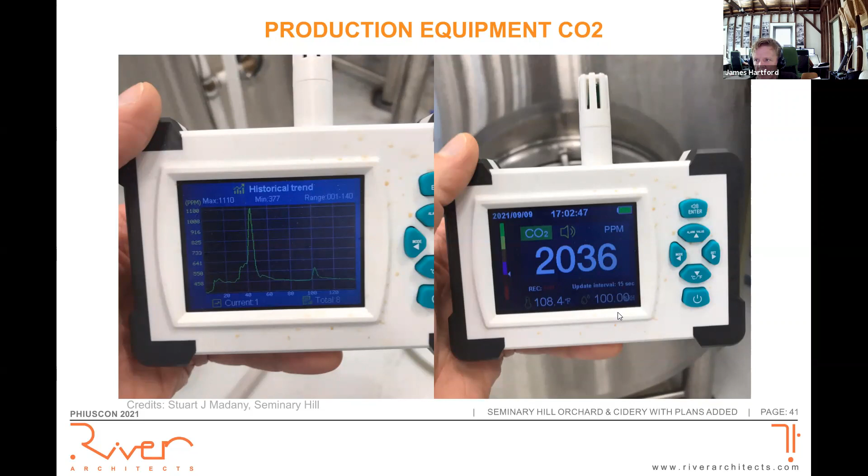2,000 parts per million will put people to sleep. So we really want no more than 800 parts per million, and even that's considered high. So this is too high for the ventilation system to keep up with. So when they do these purges of these tanks, we just came up with this simple solution of just running hoses and an inline fan to suck the air out at the points of high concentration, and it only happens a few times of the year anyway. So.

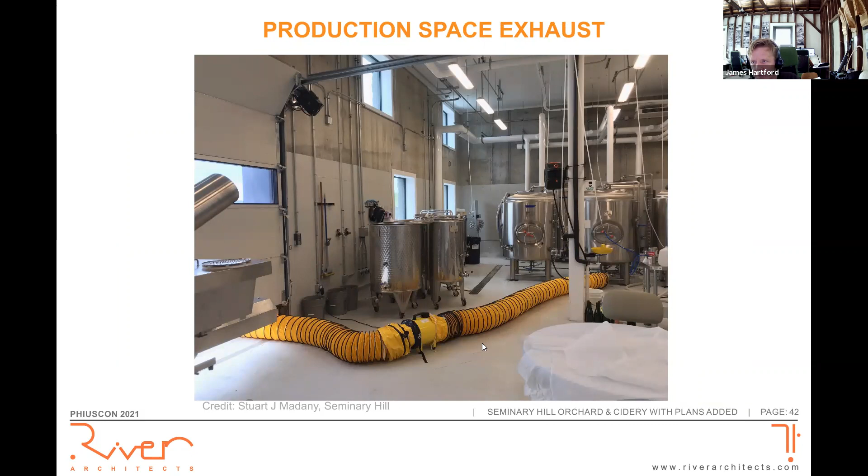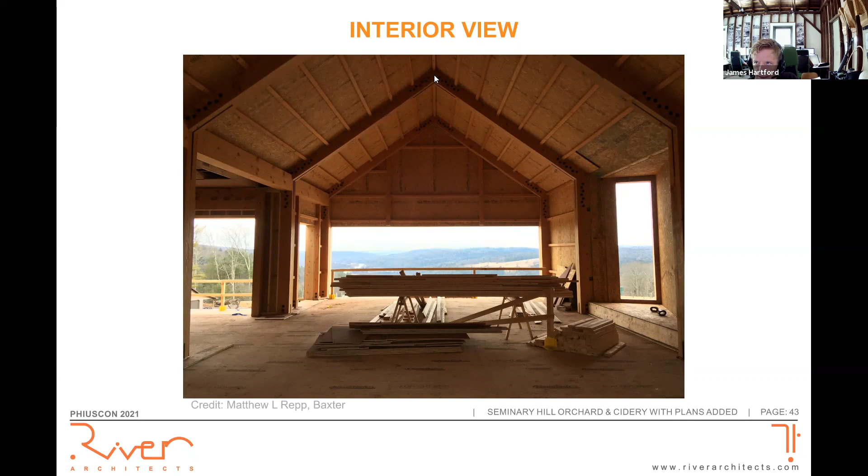But just kind of working through the construction, you can see the underside of the sheathing that was actually used for the air tightness and the timber, and then what it looks like complete. And yeah, so we had a really great team of people. We work with certified passive house builders and raters and verifiers for doing all the testing.

We got some really great publications. We were published in Metropolis Magazine, in Architecture Magazine, Design Online Magazine, and some others. And we won the Planet Positive Award from Metropolis in their hospitality division, and we also were awarded a design award at the PHIUS conference for this project too. And that's it.

I'm gonna see if there's any more questions from our students here about the cidery. Any questions? Yes. There weren't too many partitions in the plan. Is that a design choice or sustainability choice? More of a design choice because it created a lot more flexibility. If we had a lot of partitions, you really kind of lock yourself into a function.

But in terms of the cidery production space, you want it to be as open as possible because they're moving a lot of equipment, often using either forklifts or lifts from tractors actually, and the apple crates are really big and cumbersome, so they need a lot of room to swing around. So making it as column free as possible is actually desirable too. So very few partitions, and if you can, the least amount of columns too.